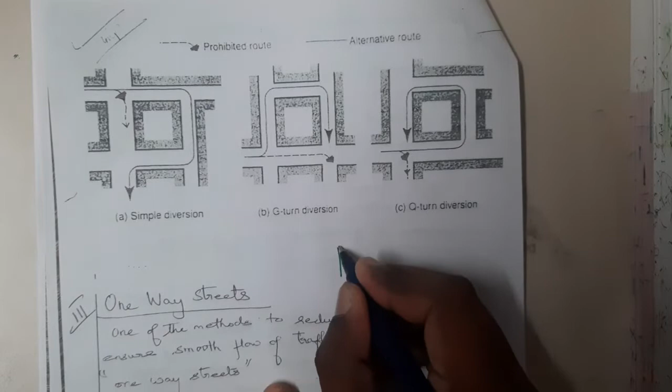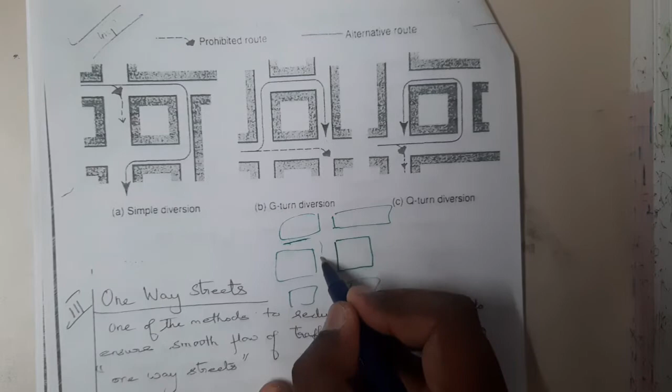Assume that this is the sector, this is one more, this is one more, and this is one more. You are from here, and you want to go this way towards the right. But this right movement is restricted here. Why? Because it is a four-way junction. So in this situation you will go a bit forward, and here you will take the right turn.

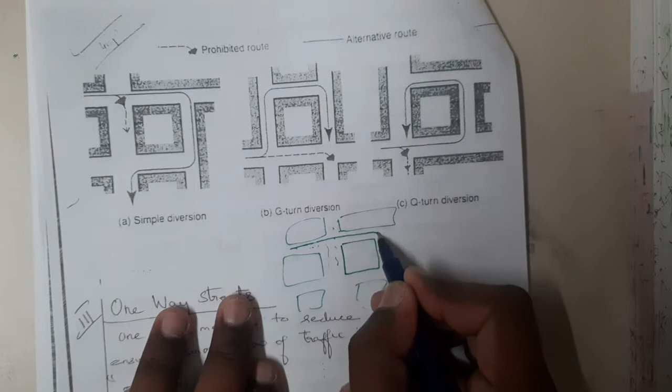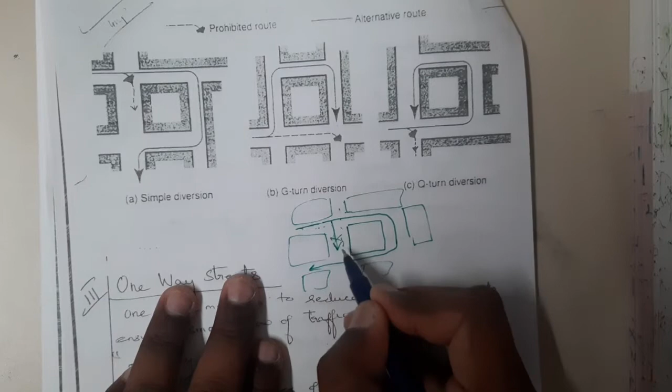Assume that here there is no more road, this is a dead end. In this situation you can go there, come back, and go straight. So here you indirectly avoided this right turn. Now you might ask how, in reality, there may not be dead ends, so how can we do it? You might have that doubt, so assume it this way, guys.

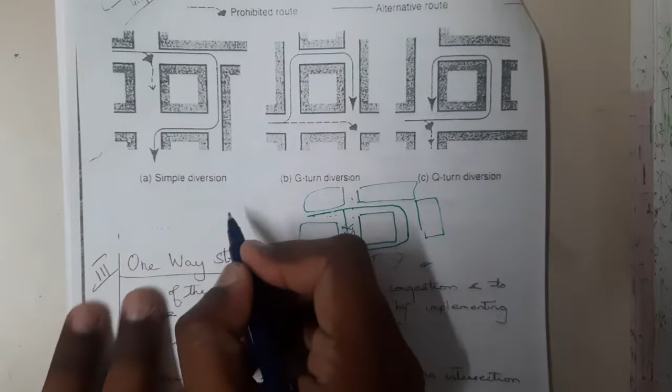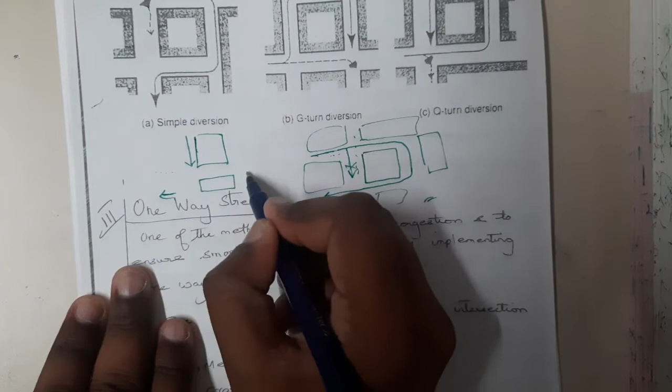Assume this is one place and this is the other place, and you want to move from here to here. This is your position and you want to come here. Here the road continues, there are buildings on both sides, and there is a divider, so you can just come this side. You start here, take this turn and come. Here this is not a four junction, whereas here it is a four junction.

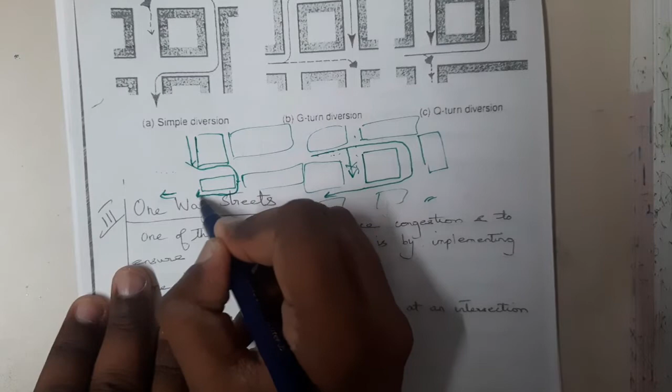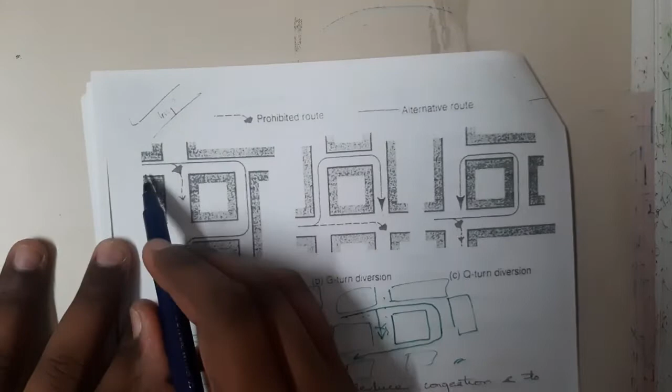Here there is a restriction because there could be a chance of an accident, but if it is not a four junction there will be no issue. So in this way you avoid it, guys. Here we gave three examples. That is a simple diversion: you needed to just go like this, but you went forward, rotated and came here. So this is a simple diversion.

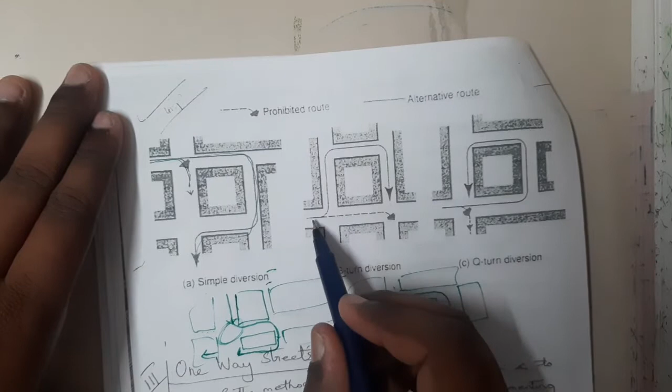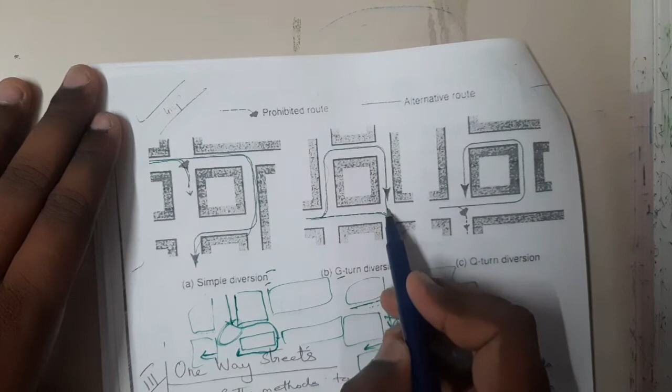Similarly, the G diversion. You want to go this way, but you recognized it beforehand. So you turn left here, then take a right turn, and then a left turn, and at the end you reach the same place. Since you are doing it before, it is called a G turn.

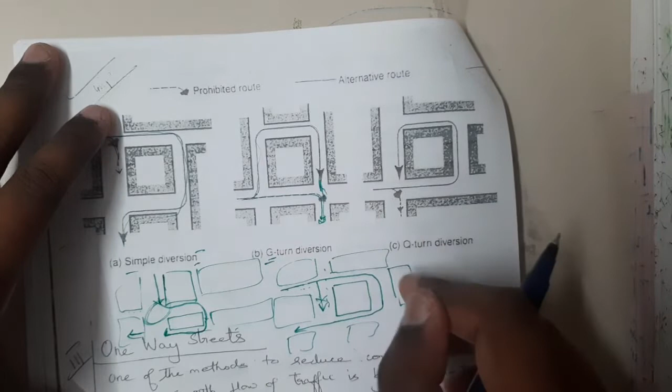If you are doing it at the exact spot, that is called a simple diversion. If you are rotating around yourself, it is called a Q turn. If you observe here, you want to go this way, but you went straight, rotated and came straight. That is nothing but a Q turn.

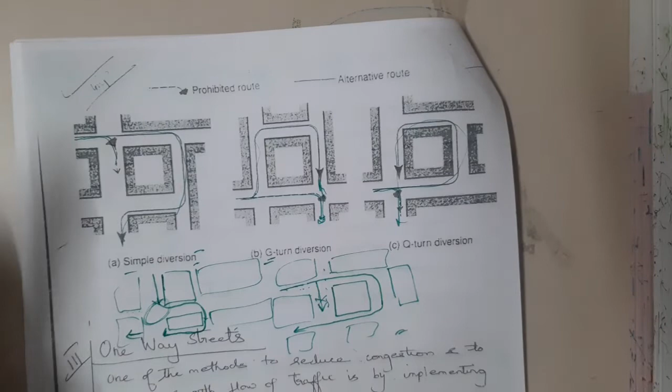So I hope everyone got some basic idea with these things, right? Yes. So let us continue with the one-way streets. From the name only you can say these streets allow only a one-way direction of flow of traffic. One of the methods to reduce congestion and to ensure a smooth flow of traffic is by implementing one-way streets.

The various types of conflicts are merging, crossing and diverging. By implementing one-way streets, we can reduce various conflicts which could happen, guys. Here in our book there is a small example. This is a four-way junction, and there are all possible vehicles coming. Here we give everyone two lanes, so a two-way route.

In this situation, this vehicle can go straight, turn in that way, or turn in this way. So it has three different options. Similarly, you draw for all, and make sure the outgoing is this only and the incoming is this only. Try to connect each and every one. Then mark all the points where the lines are intersecting. You'll be getting a total of 24 conflicts.

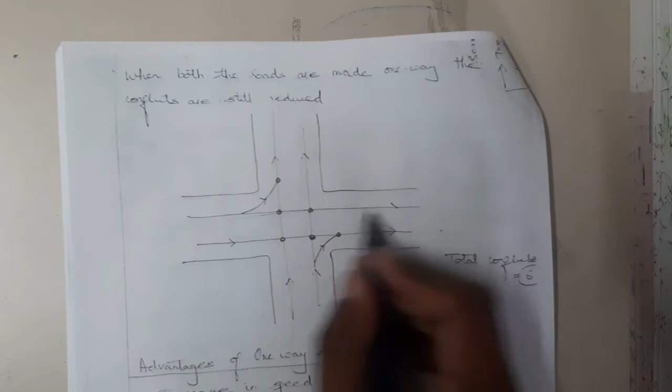If you make any one of the roads one-way, so this lane will only accept or only forward, in that situation we reduce the conflicts to 11. So making a two-lane into a one-way will help, guys. That is the reason why most popular places have one-way lanes. If we make all the roads one-way, both lanes in this way and both lanes in that way, in this situation we have 6 conflicts.

Now let us go through some advantages and disadvantages of one-way streets. It increases the speed of vehicles, so you can go smoothly without any obstacles coming opposite to you. Similarly, greater capacity to accommodate the traffic, so more vehicles can travel on the same road, because previously it was two-way and now it is one-way. Similarly, improved pedestrian movements, so people can also go smoothly.

Similarly, reduced accidents, because there is no opposite traffic, so there could be rear-end collisions but not head-on. Similarly, reduced signal delay, as fewer signal phases are needed. Everyone will be going straight or just turning, so there will be no issues of signals here. Similarly, left turning lanes are not needed, and improvement of the driver's field of vision.

The disadvantages are increased trip length, as vehicles may have to travel a longer distance. In your locality there could be some one-ways, right? Going along the path is fine, but if you want to come in the opposite direction it will be a huge job, because you need to go around it. So that's one of the disadvantages.

Similarly, there will be fewer turnings and movements for vehicles, so your options will reduce, guys. Similarly, additional traffic sign boards are required. So I hope everyone got some basic idea on this. Till now we discussed 3 different methods.